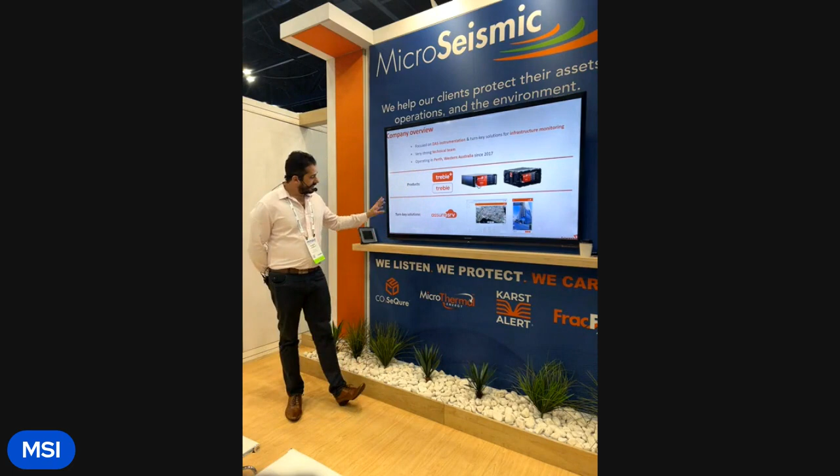Today we have two principal products. The first is the Treble. You might already see where this is going with the high frequencies - Treble as in A, Treble is the hardware piece. We also have a second product, a turnkey solution called Assure SRB. This turnkey solution effectively simplifies the data generated by these machines, which can often be terabytes and terabytes of data. Very rich data.

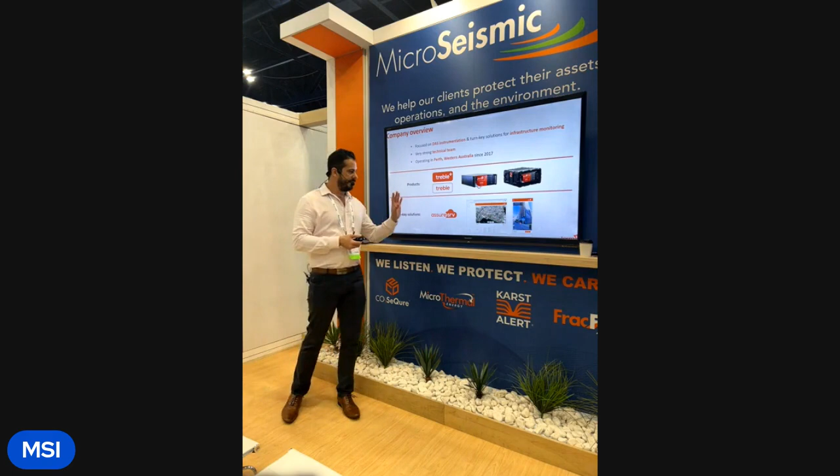The machines can produce tons and tons of data, which we really need to filter down and simplify for the end customers to give them a state of their assets - so it's good, it's bad, this is why it's bad.

Let's talk about the highs, and I'll go through a couple of demonstrations here. My first demonstration is an acoustic demonstration. You can see one of my colleagues speaking towards the camera, and I want to drive home the point that what she is saying is being recorded and played back purely on the fiber optic cable. There are no microphones involved here. Despite the camera situation, we're not playing back the audio from the camera - we're playing back the audio purely on the fiber optic cable, audio extracted on just the 20-meter section of fiber.

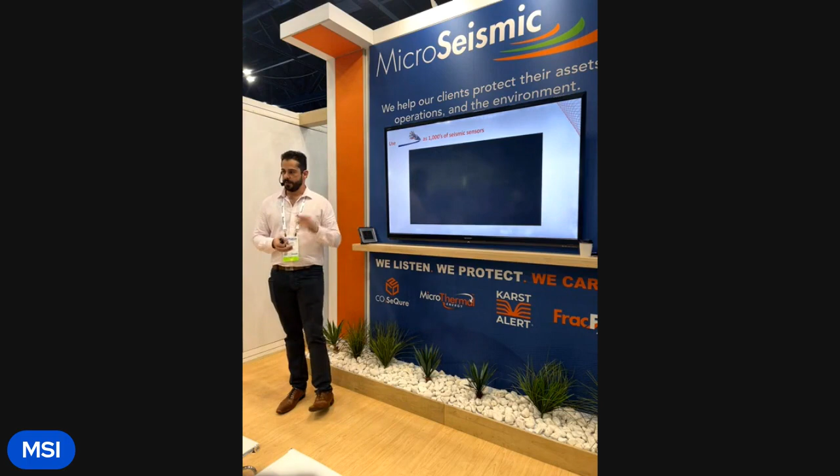What we've just seen there, that audio playback, is purely on the fiber optic cable. This is not some sort of trickery. If you've seen DAS systems before and heard an acoustic playback, generally this is being done across an entire spool of fiber. We're not doing that - we're zeroing in on just the 20 meters, and the audio is super clear. We're looking between 0 hertz and 6 kilohertz, well into the acoustic bandwidth.

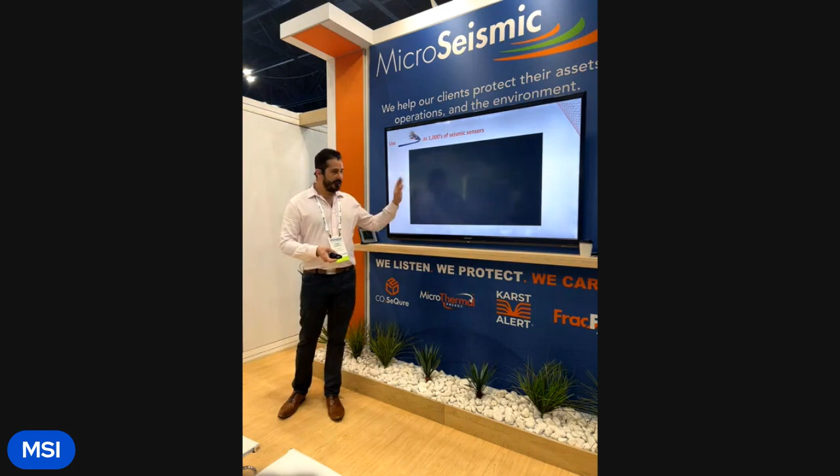That's one component of this, and you would have seen in the background she had two different displays. One is the Fourier transform of the spectrum being calculated and generated on the fly, and on the left-hand side you would have seen a full waveform plot. I'm happy to show anybody this again who wants to see it after this demonstration. I've got a couple other demonstrations to go through.

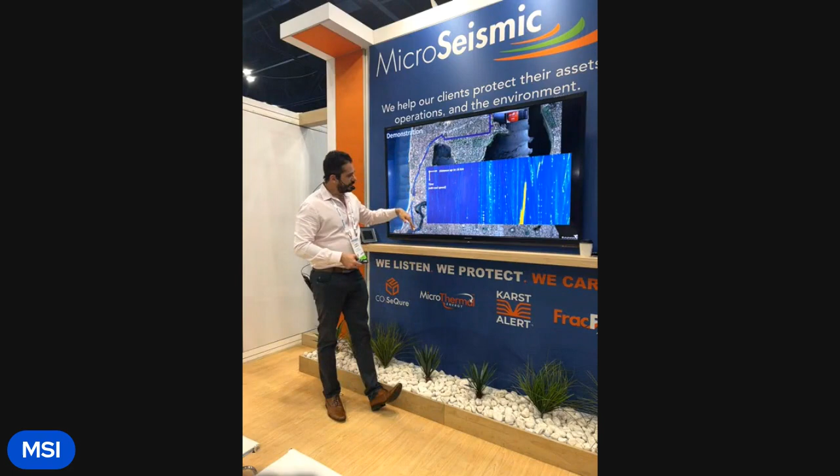This one here shows a 16-kilometer long fiber path being displayed along this map. You're seeing effectively a live time slice shown in the map view, and that same information is represented in this waterfall plot, where the most recent information is at time 0 at the top, scrolling down continuously in time - roughly 0 meters here, down to roughly 15 kilometers, somewhere out at the bridge level. What you see in the data here is extremely rich. There's a lot happening - there are these diagonal lines.

First let's describe the colors. The dark purples, these very dark colors, are low vibration intensity colors. As you scale up into the greens, the yellows, you start seeing a lot more vibration intensity being displayed.

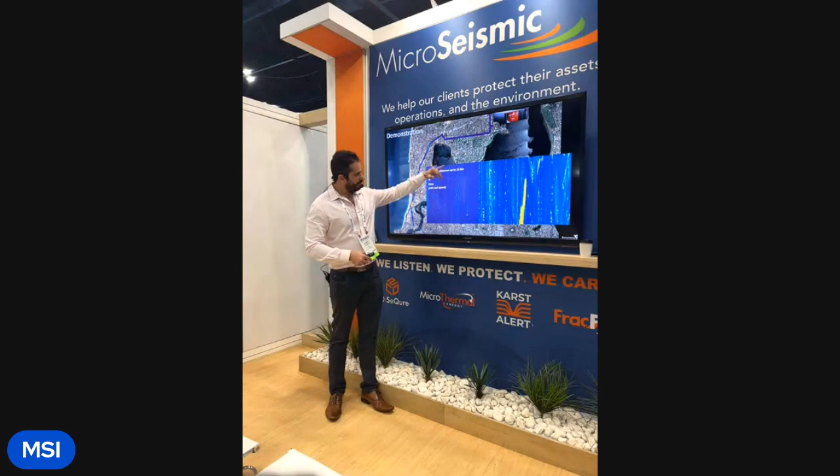There are some stationary features shown - I say stationary because they don't change position in space, they just continuously scroll in time at one location. There are other features that move diagonally, with some move out - these are in fact cars traveling up and down the road through a very quiet, expensive neighborhood just here. Not a whole lot of activity, not a whole lot of traffic. We can count the cars, measure the speed of the cars, and look at imperfections in the road network. There's a great many things happening here.

The stationary positions showing some activity are either construction, imperfections in the road, or other things, and we can actually play back all these sounds. So what you heard in the previous demonstration was true acoustic playback of my colleague speaking. What I'm about to play here is sounds extracted at individual locations along the fiber.

I want to make special note, this is fiber already in the ground, telecommunications fiber. We're just tapped into it for a short period of time. It's about 3 feet below the ground, and the sounds you're going to hear are extracted from that fiber 3 feet below the ground. One more thing - this is a train here, this very bright yellow line, that's a train moving up and down the track. So I'll just let these play through.

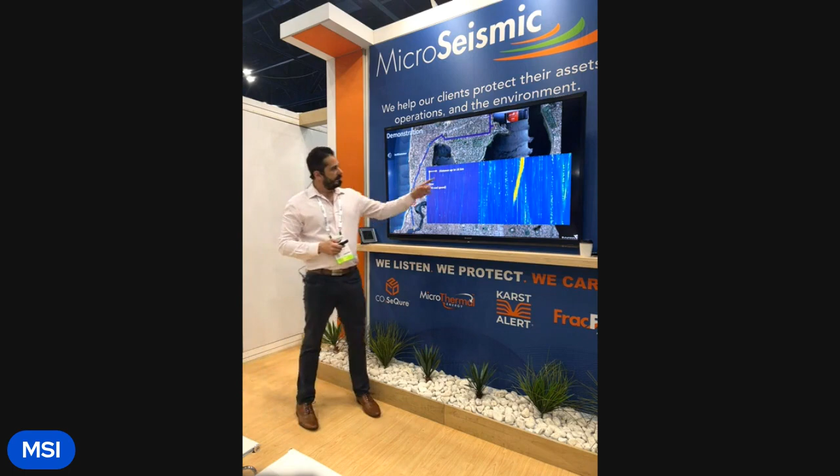So that sound was extracted from this position here. It's intermittent, somebody's there working, jackhammering away. Jackhammer stops, it disappears, jackhammer starts going again, and you get a little dot at that location.

The telltale sign of a rear and front axle going over a pothole.

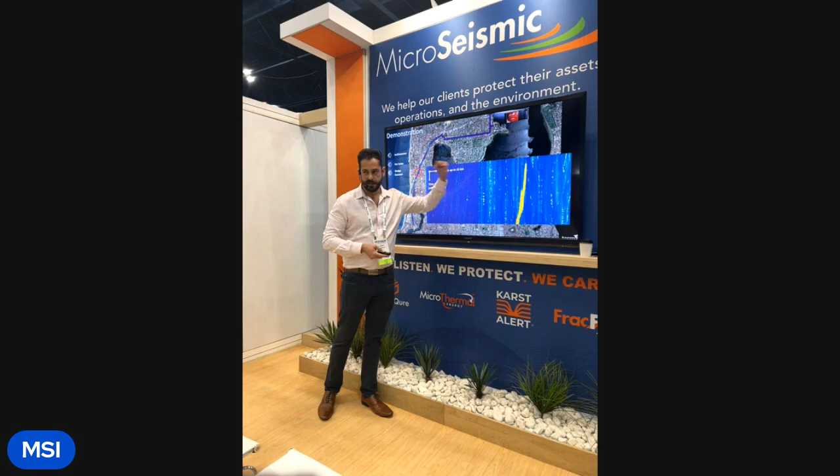Sledgehammer, again, this is a stationary position, and you would see that just continuously hitting the ground wherever they're doing the work.

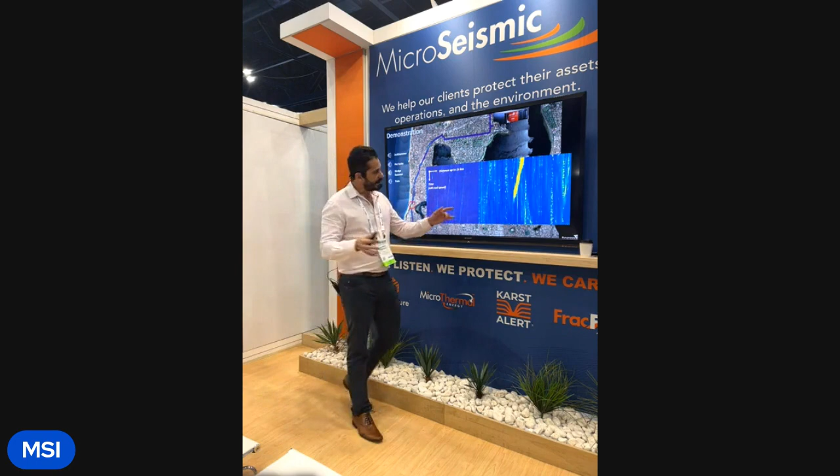That's a train. As it comes into the station, it stops, and in fact, that's this train here. Comes in, stops at the station, picks up its passengers, moves to the next location, picks up passengers, and continues on.

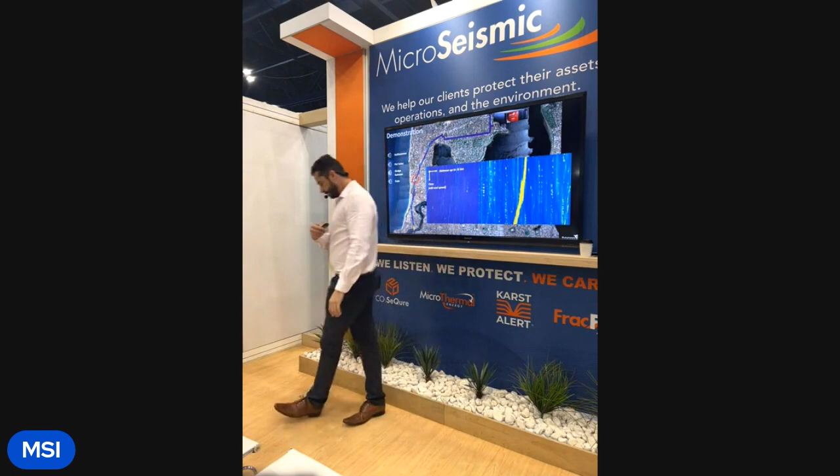I'm sure in the back not everybody can hear these sounds, but that would have been drainage. You hear the bubbling of a blocked drain.

So most of this demonstration is about asset monitoring or infrastructure monitoring.

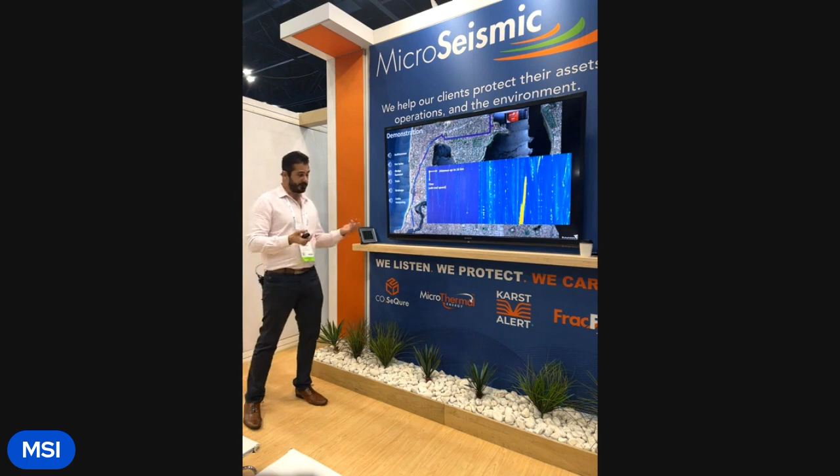That's what it sounds like when somebody's pulling on the cable. And if somebody wants a demonstration of this, I have an interrogator just behind us here with some fiber optic cable. And that's all it is, just fiber.

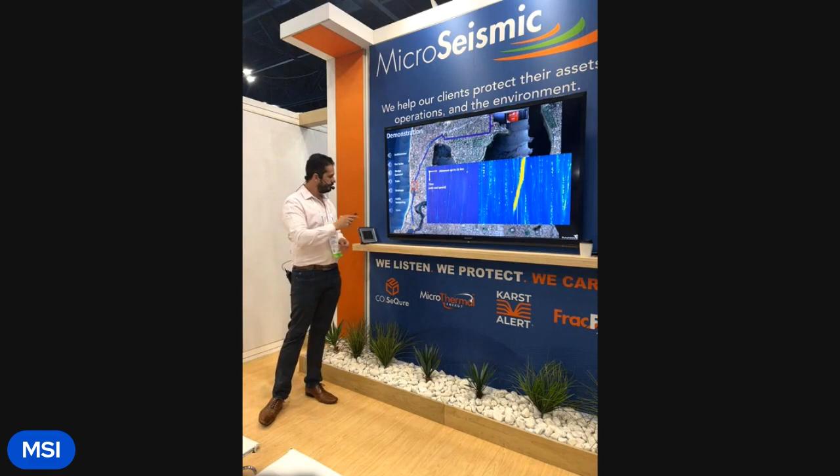Quite a clear one. Any questions? Yeah, keep...

going. As I started the talk, I mentioned that the high notes matter. And the high notes are quite important. Traditionally speaking, the DAS industry has been focusing on the low frequencies. The low frequencies are excellent.

If you're looking for passive seismic, for example, you're listening for earthquakes, those ultra low frequencies make a big difference. Terra 15 has come into the market with a different mentality. Nobody's really chasing the higher frequencies, the mid to high frequencies.

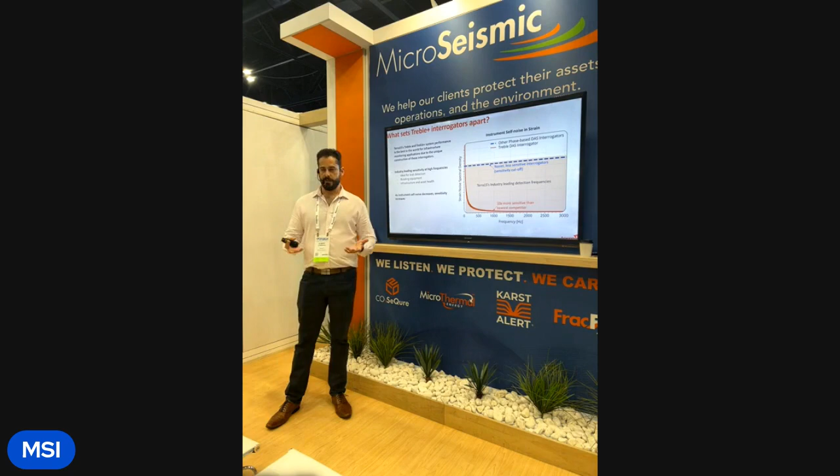And when I say mid to highs, I'm talking about 40 hertz up to well into the kilohertz ranges. That's really what we're chasing. That's really what we'd like to be industry leaders in.

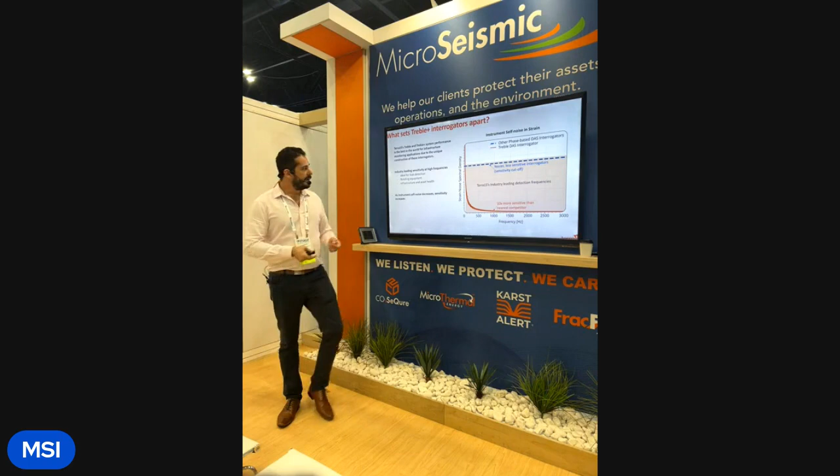What I'm showing in this plot here, this is typical DAS competitor, give or take 10-15%, depending on which competitor. And what you're seeing here, this is our noise performance. This is system self-noise. And when it comes to instrument noise, the lower, the better.

That makes you more sensitive. The lower your instrument noise, the more sensitive you are to those frequencies.

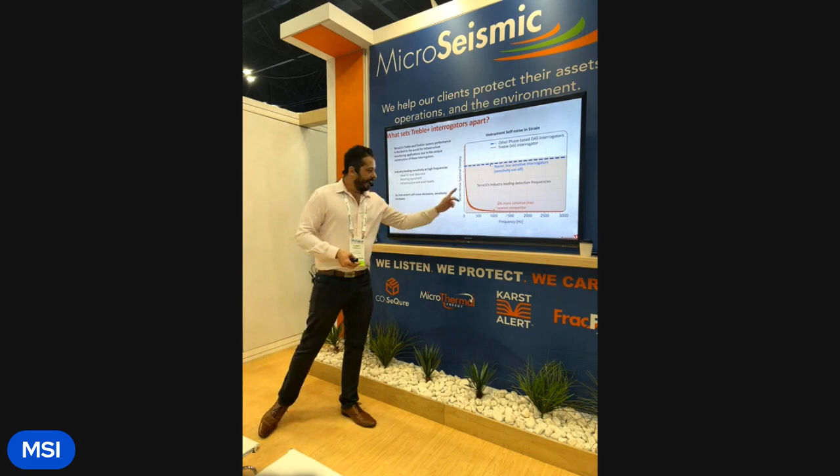Now our crossover point with the majority of phase-based DAS interrogators is roughly 40 hertz to 60 hertz, depending on the interrogator. After that point, we become far, far more sensitive than the typical interrogator. At 1 kilohertz, certainly, we're about 10 times more sensitive than the nearest

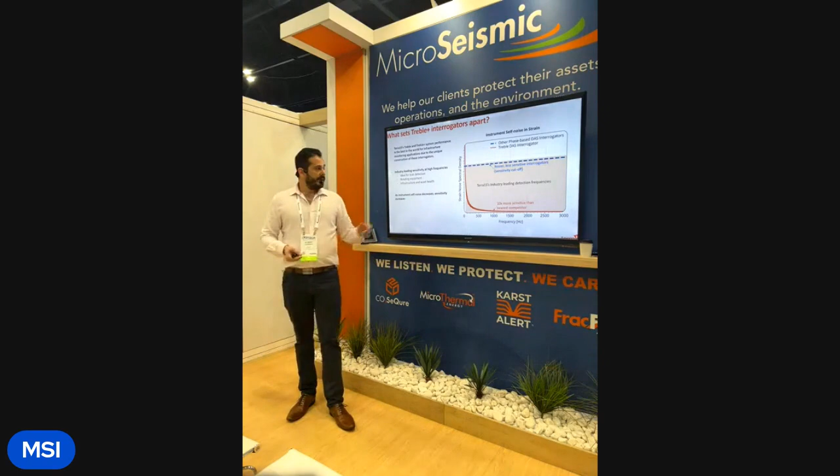competitor. So at these frequencies, you're pretty much getting into the acoustic range. Leak detection for pipelines occurs at these frequencies. Certainly not in the very lows.

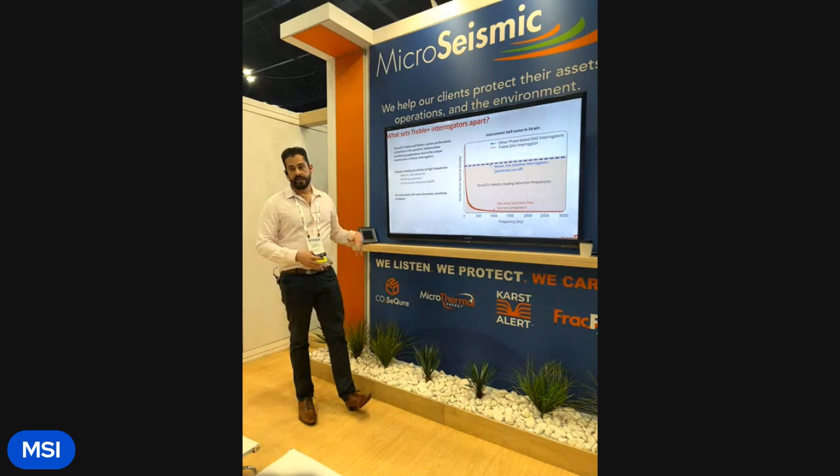A lot of asset monitoring, all the stuff that you just heard, that's well into the kilohertz ranges.

All right, so how do we work in seismic, right? I mentioned that we're not the most amazing system in the world at low frequencies. That does not mean that we're not good at low frequencies.

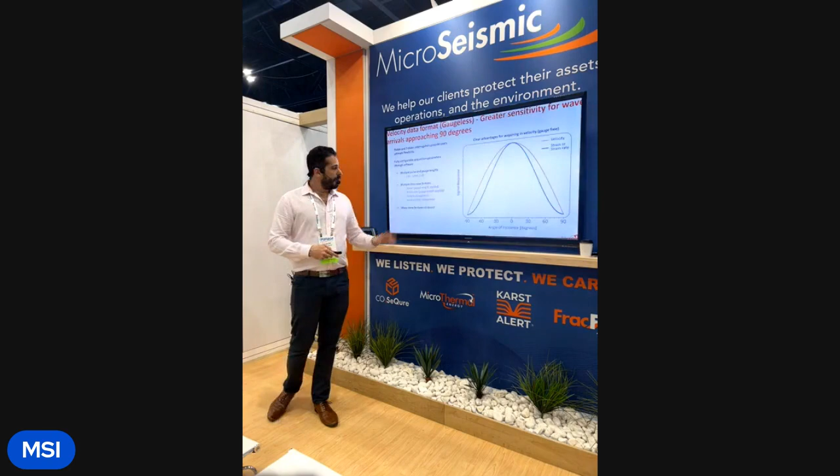We are still quite good there. And we can talk about why that is. There's a lot of unique selling points and unique advantages to these interrogators. These interrogators have just a lot of features.

They're all multiple pulse and multiple gauge length configurable, and that's in software. You can set increments of fiber optic cable that you would like to use as sensing elements. So imagine 10 miles of fiber optic cable, and you can subdivide that fiber optic cable anywhere between 1 meter and 100 meter sensing increments, giving you thousands of sensors potentially.

Another thing that is quite special about these interrogators is that we can save in a very unique format for the DAS industry, and that's in velocity. This is some work published by Sedenko et al. in 2020, showing the benefits of recording in velocity.

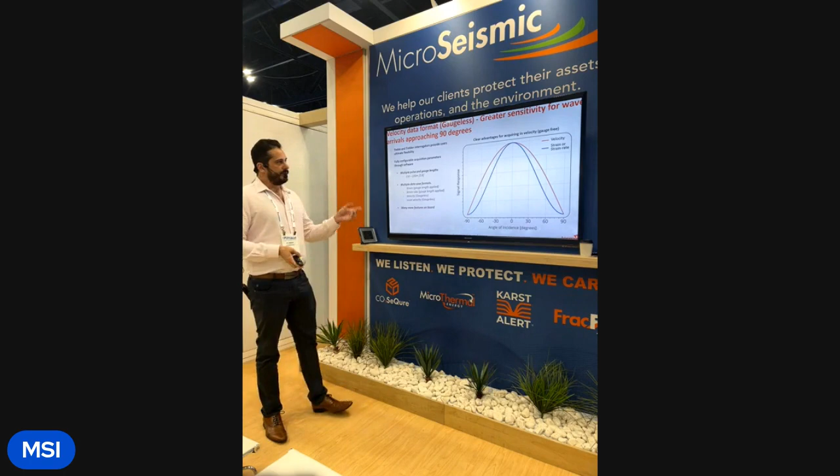One of those benefits is the increased sensitivity with increasing angle of incidence. This is a well-known problem with fiber optics. You are less sensitive to broadside arrivals, so arrivals approaching 90 degrees to the fiber optic cable. That's a known issue.

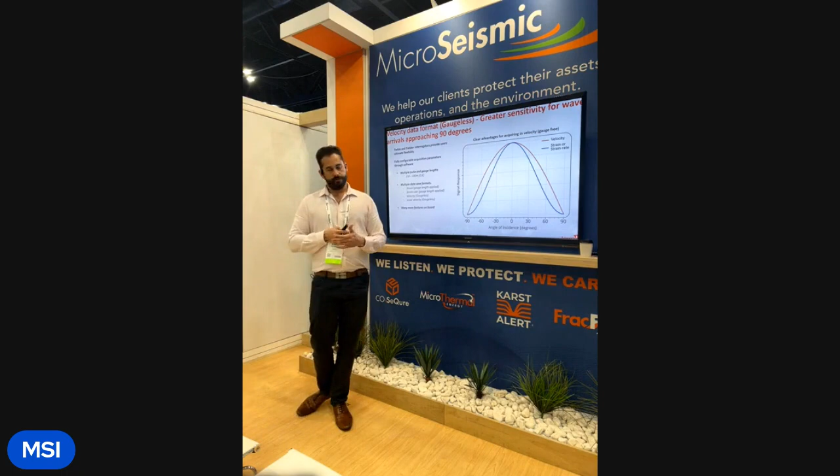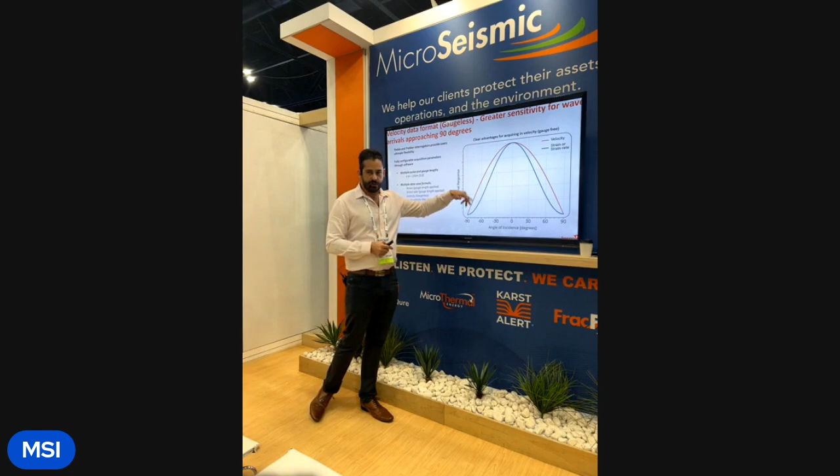Saving velocity, though, you can see that there is a much stronger, much higher response saving in this data format than there is saving in the traditional strain or strain rate format. That is quite special. It gives you the ability to sense P waves and S waves a whole lot better, but especially if they're vertically incident.

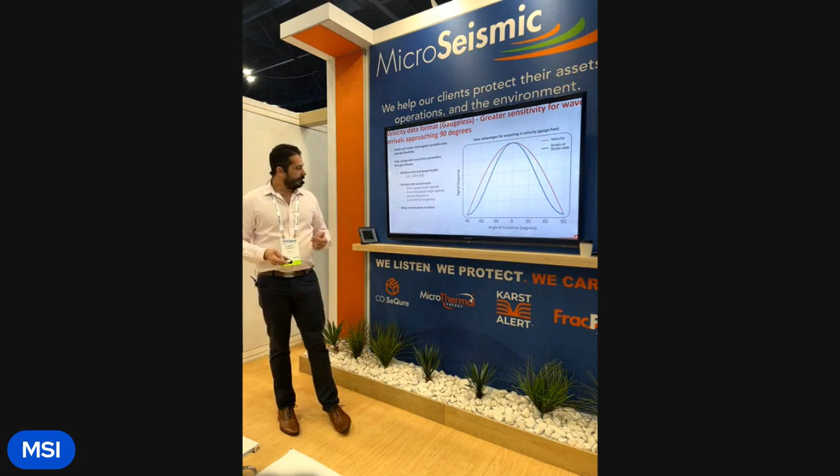There's quite a lot of other features. Please talk to me about it afterwards if you'd like to know more.

Our system has been validated on a number of seismic use cases. That includes active land acquisitions, 2D, 3D, downwell VSPs, passive seismic acquisitions, on land surface wave inversion, MASW. We do a lot of microseismic monitoring on mines and monitoring of hydraulic fracturing in oil and gas. And we partnered with MicroSeismic for these applications principally.

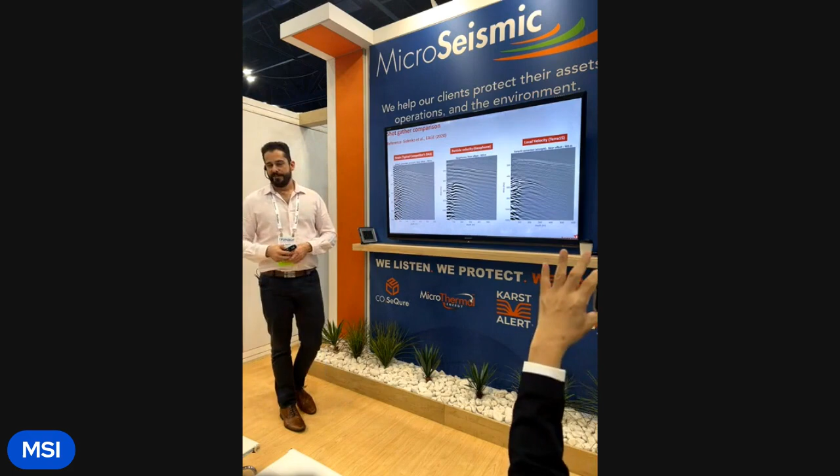How does that compare with geophones, you might ask? Most people are familiar with the way geophones look in the VSP setting. And how do we compare with other strain-based systems? Again, the topic of my talk is why the high notes matter. If you're looking at high-resolution seismic, you really want to see those shallow layers and get really nice bedding, differentiating those. You need a system that's very sensitive at mid to high frequencies.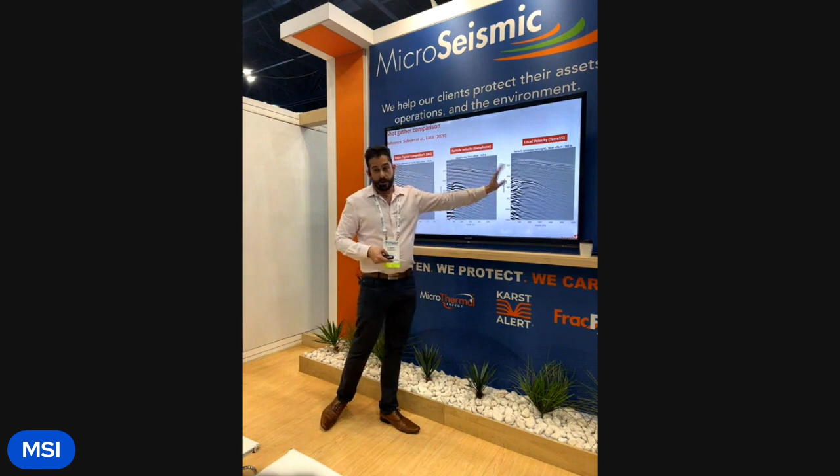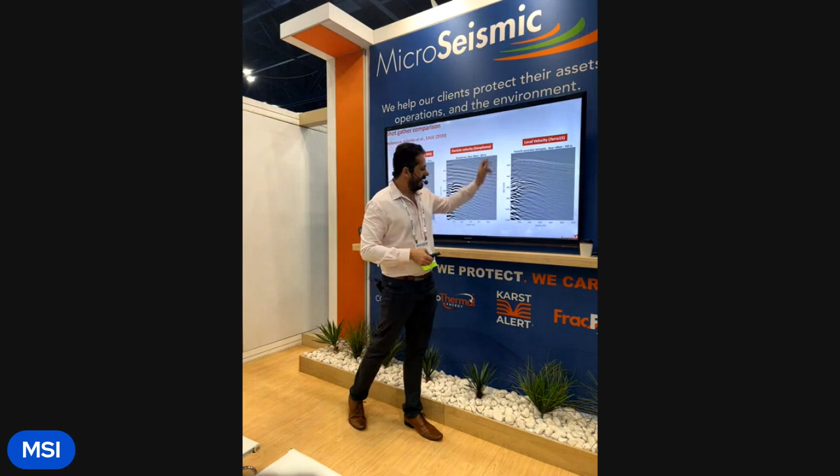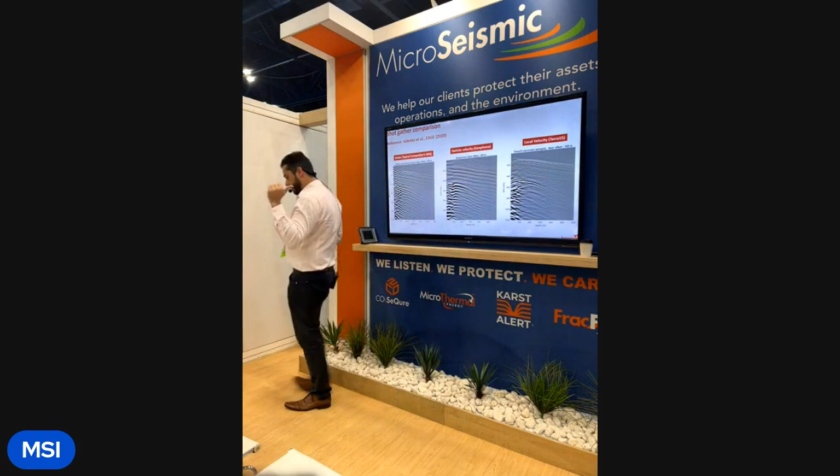This is our system here on the right, actually one of our older systems. What you see behind you is an order of magnitude more sensitive than this particular piece of equipment that generated this image. You can see on the traditional strain-based system, you lose out on a lot of the reflections. To give everybody a primer on shot gathers, depth is along the x-axis here, with 0 meters and 600 meters at the far ends, and time is on the vertical axis. This is your direct arrival. At the top you can see some reflections, these diagonal lines, and some mode-converted waves here. If you look at a traditional strain-based system, these are not extremely clear—you're not resolving that level of detail to the degree that you could.

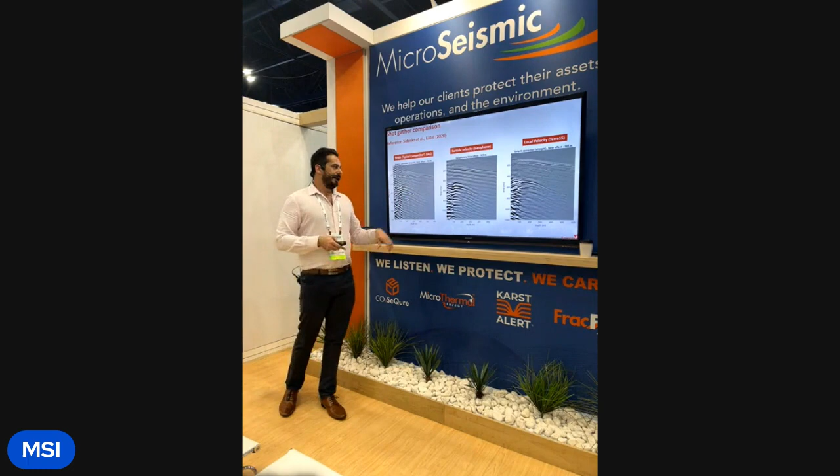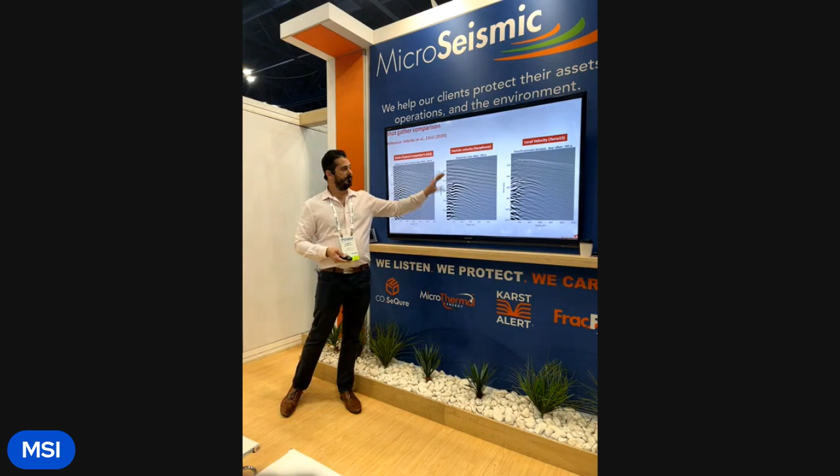Geophones have certain limitations. What is your geophone spacing? What is the drop increment? In this particular case, I think they did a disservice and dropped every 10 meters, so you get a much lower resolution. Now this was 15 sweeps—sorry, actually more than that, it's like 25 sweeps. That was a single sweep—much cheaper, much easier way to do this.

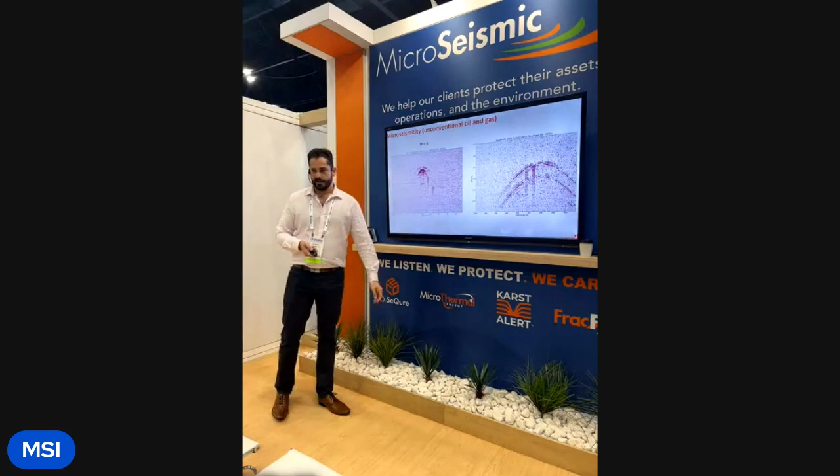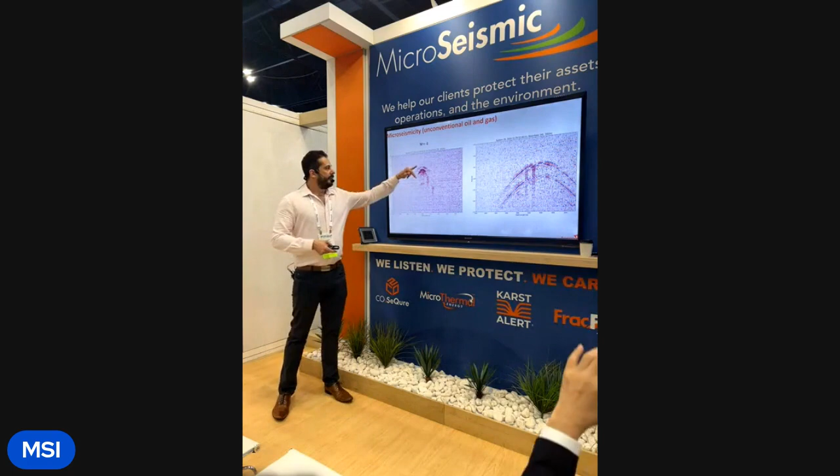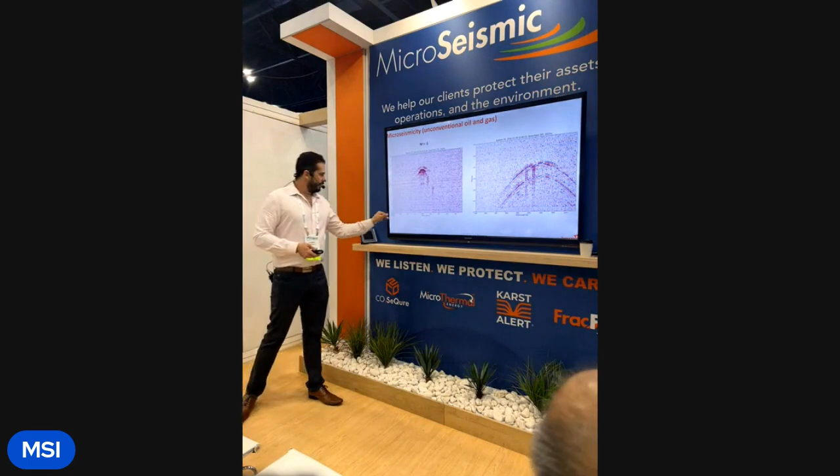Microseismicity—in the frequency bands that microseismic events tend to occur, we are probably the most sensitive system in the world for those applications. What we have here on the left is a magnitude -1 microseismic event. You have your P waves, S waves. On the right-hand side you actually have a doublet, so two activations of the same location at different points in time. Again, we're looking at distance along the x-axis, time along the y-axis.

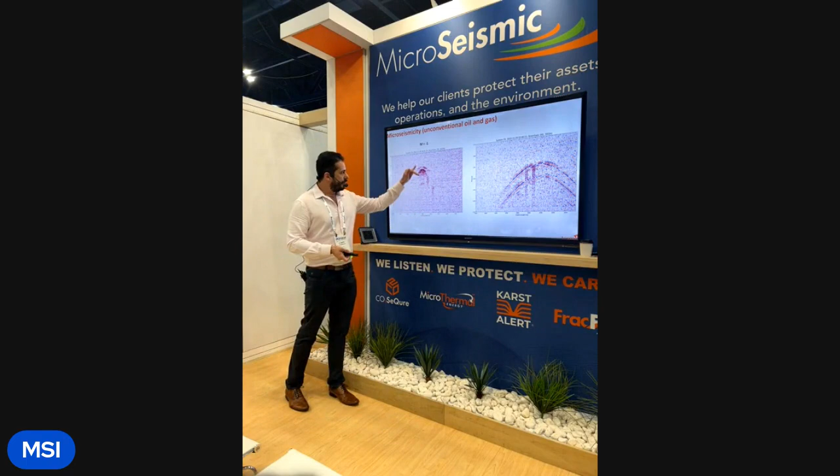50 to 320 hertz bandpass, 60 to 300 hertz bandpass—really beautiful, really clear. We can identify the exact position along the cable by identifying the peak. At this position here, this is roughly 4850 meters. This position here, 5200 meters along the fiber optic cable.

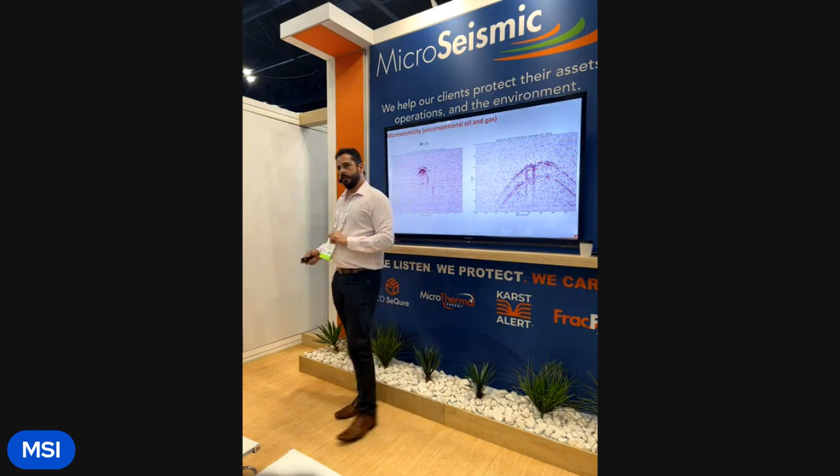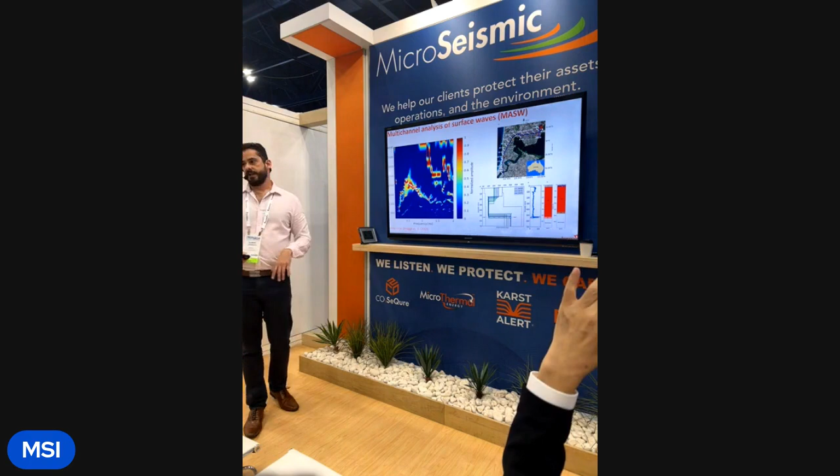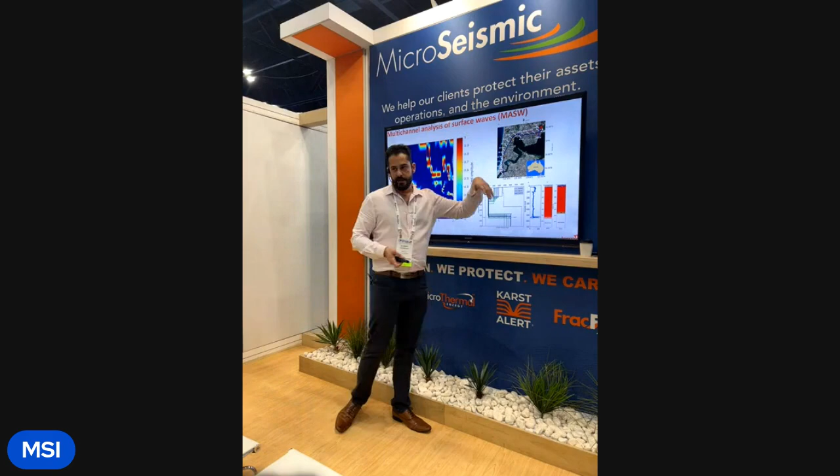Now, I say the highs matter—yes, they do. They give you ultra high resolution seismic, excellent for microseismic work. But the systems are not slouches for low frequency work either. This is some MASW, passive multi-channel analysis of surface waves. What was used as a source here is just the ambient wave field, the ambient noise from waves impacting the coast. As they impact the coast, these waves travel down the fiber optic path, and we've just used this section here.

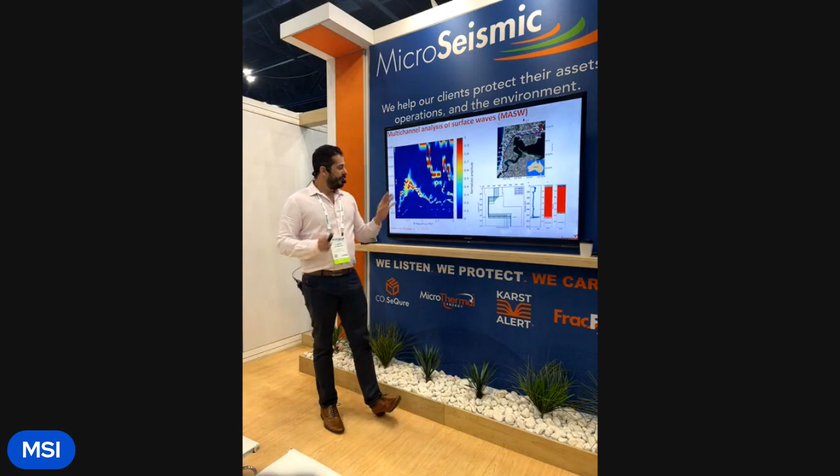Now we've correlated this—I should say Schrag et al. correlated this to a known borehole just where that green dot is, and the tie is rather remarkable. So we can see down to 500 meters with a passive wave field at frequencies sub 2 Hz.

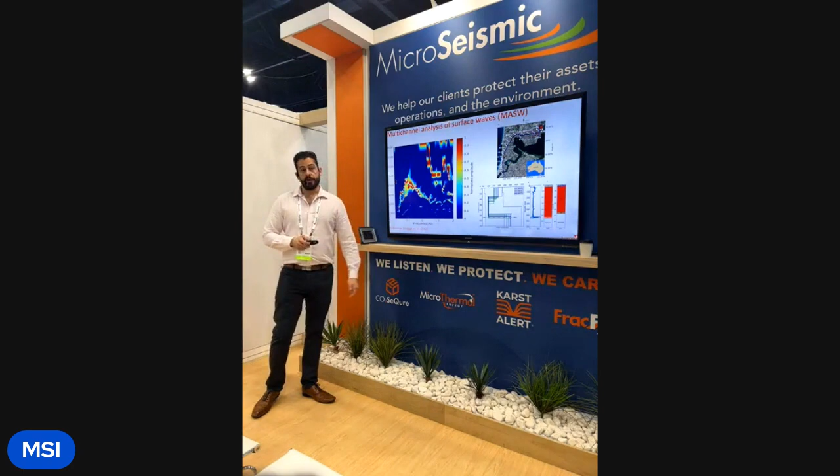We also have a passive array in Perth that we're not using for earthquake monitoring or any sort of seismic monitoring—what we're using this for is pipeline monitoring. So we monitor for leaks in the city of Perth. This is an excellent technology for that application. In fact, I have a presentation tomorrow talking purely about the use of this technology for pipeline monitoring.

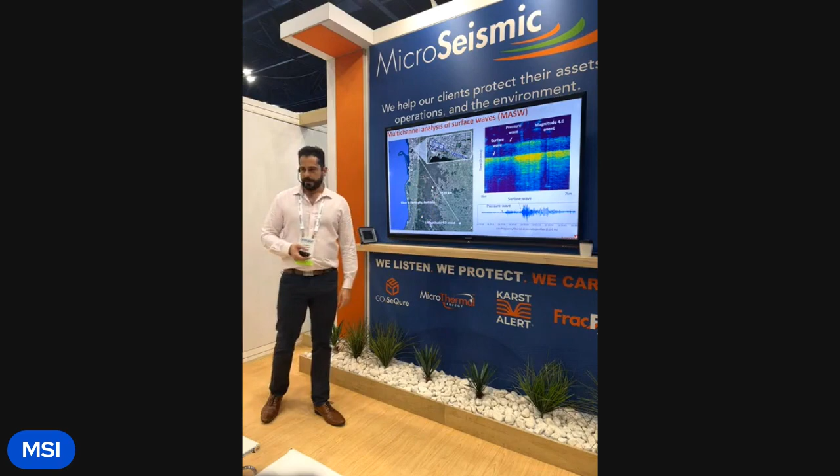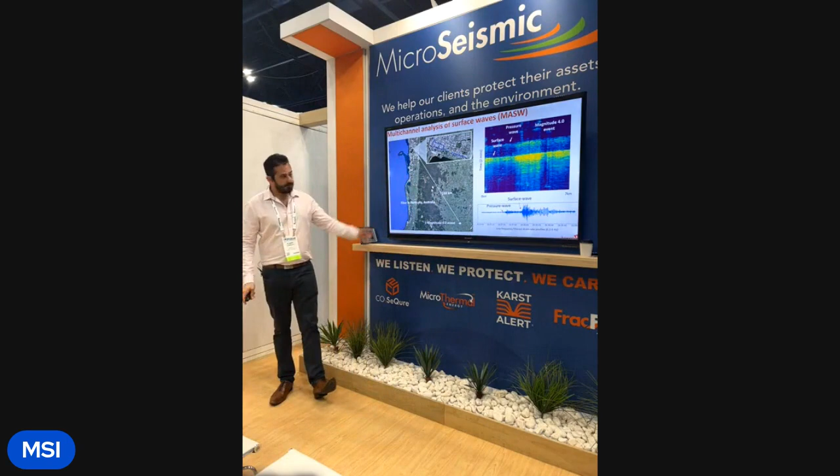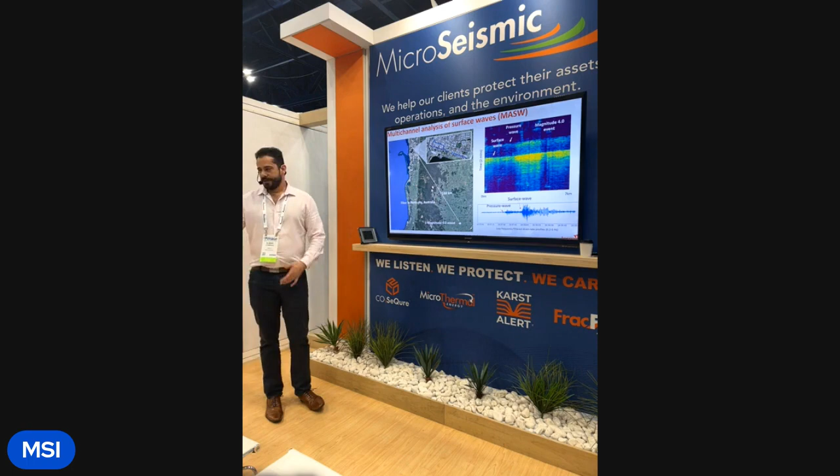But we've also been able to use this to detect earthquakes. This is a magnitude 4 event that occurred roughly 188 kilometers away from the fiber optic cable. You can see a very clear P wave arrival, S wave arrival. We've correlated this as well to a seismometer not too far away, and the tie, although not perfect, is remarkably good. A lot of factors contribute to that—this is just using a cable in the ground, not particularly well coupled to the rock mass. Coils, shenanigans, all sorts of things happening on these cables.

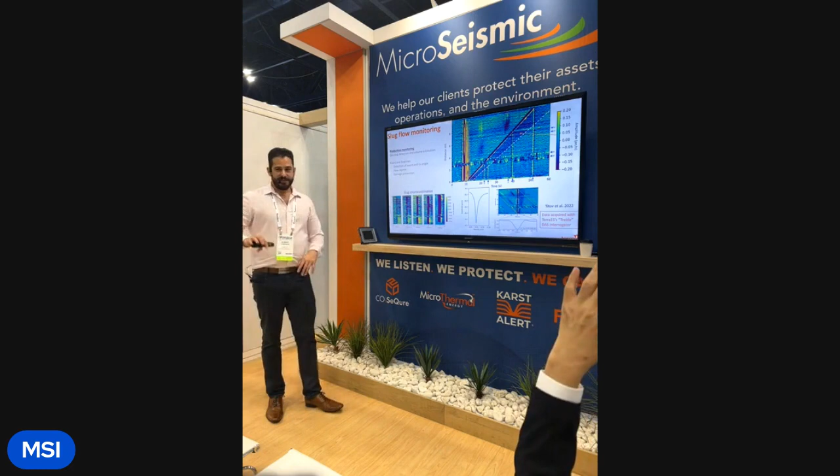Excellent for slug flow monitoring, production monitoring down well. Again, I have a whole series of other topics and conversations we can get into with this technology. So if you have any questions, please let me know. Let's jump to the next one.

So, any questions? Everyone feeling enlightened about DAS?

Yeah, so what you saw on the waterfall plot, that's an RMS—an RMS extraction of the vibration intensity. We've...